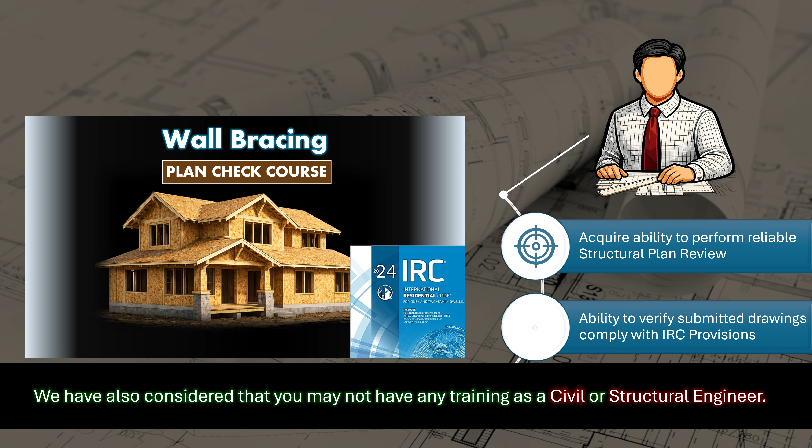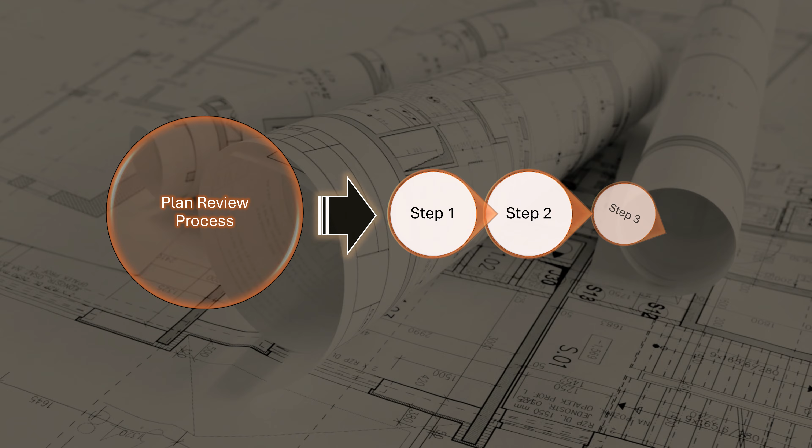The development of this course was guided by the assumption that the primary reason you are considering taking this course is to acquire the ability to perform a thorough and reliable structural plan review of residential wall bracing systems and verify that the submitted drawings comply with the provisions of the International Residential Code. We have also considered that you may not have any training as a civil or structural engineer. Therefore, we have spared no effort to ensure that this course has the capacity to help you achieve the objectives that brought you here. The good news is that while the plan review process may appear overwhelming at first due to the number of code provisions involved, a disciplined and structured methodology can transform the process into a manageable and repeatable professional task.

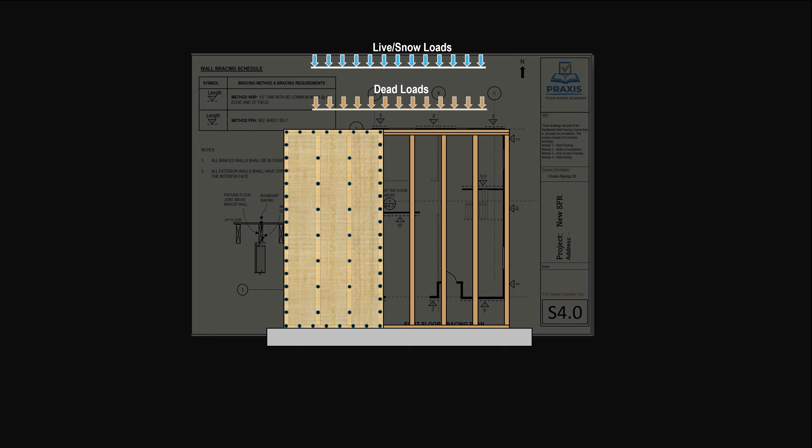The plan review process for braced walls begins after the reviewer has determined the wind and seismic design criteria that should apply to the project at hand. The structural design consists of the development of a system of structural elements to resist gravity loads such as dead loads, live loads, and snow loads, as well as lateral loads including wind loads and seismic loads. Wall bracing is specifically installed to provide support against lateral loads such as wind loads and seismic loads, and therefore belongs to a system of structural elements known as the lateral force resisting system.

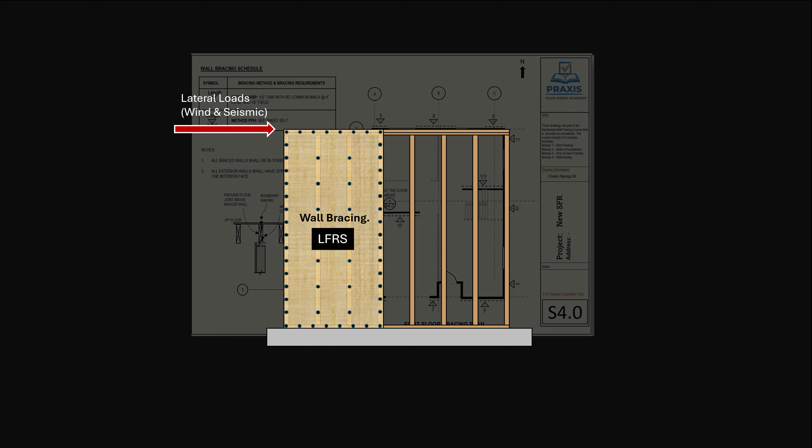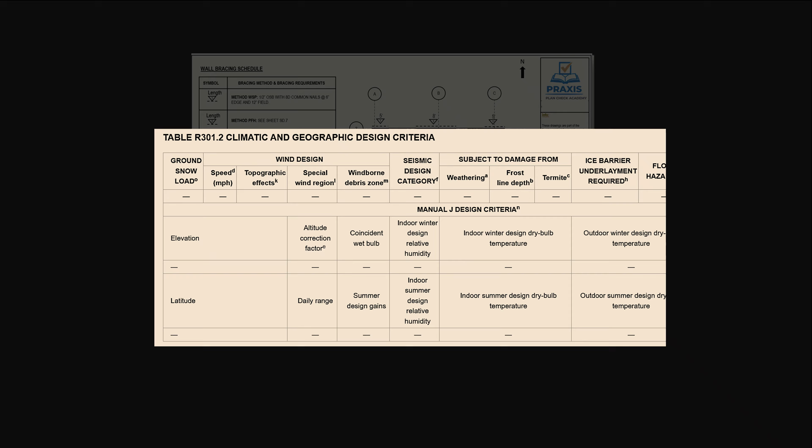This course will not just look at wall bracing in isolation. Rather, we will look at the entire lateral load resisting system and see how everything comes together to form a robust structural framework that conforms to the adopted building codes. We will start by breaking down the intricacies of wind and seismic loading as it is envisaged in the residential code. At this introductory stage, we will guide you through a comprehensive lesson on the fundamental parameters that underpin the wind and seismic design criteria. This will ensure that you will gain a thorough understanding of their development and application in design practice.

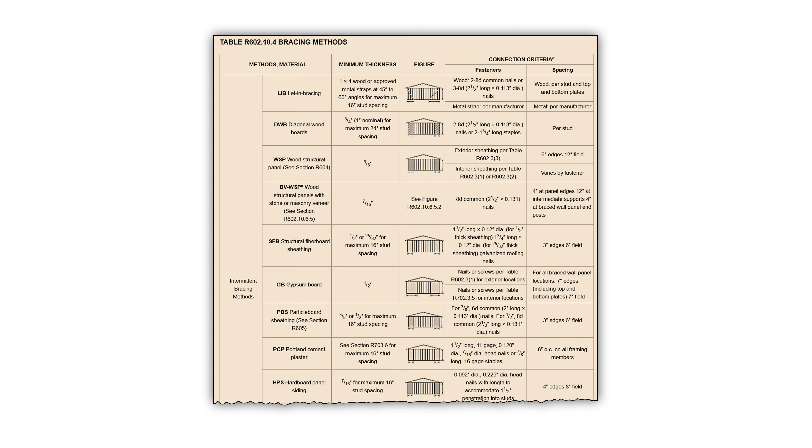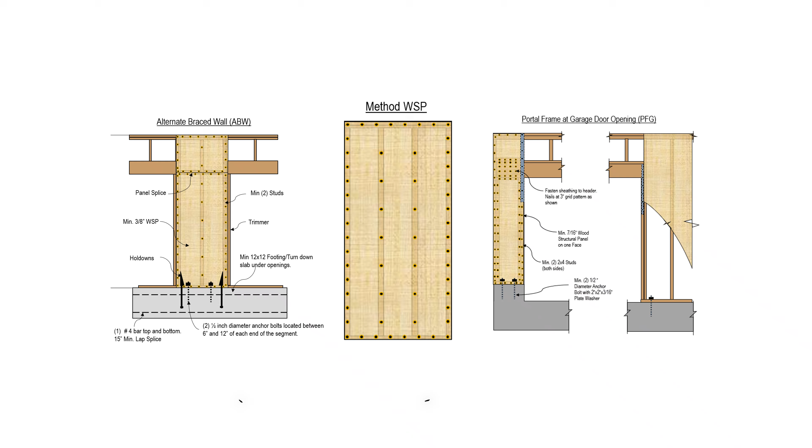This comprehensive introduction will open the way that allows us to dive into the heart of wall bracing. We will embark on a thorough and extremely rigorous exploration of the code provisions for the design and construction of different wall bracing methods, where we will focus on the most common bracing methods before exploring the limitations for mixing bracing methods on a project. We will look at the properties of braced wall lines and the code provisions governing their placement on a floor plan. Additionally, we will look at the placement of wall bracing along a braced wall line, including all the constraints that govern the location, spacing, and distribution of wall bracing.

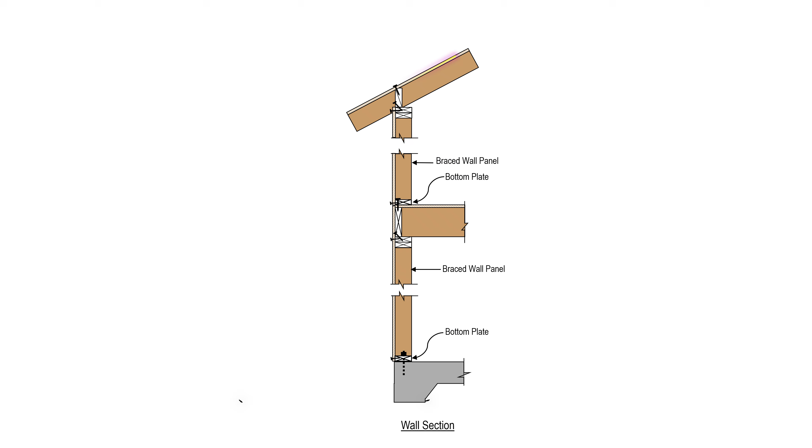This will bring us to the load path section, where you will learn how all the critical elements come together to form a continuous system that has sufficient capacity to transfer lateral loads from the roof to the foundations. Additionally, we will cover all the requirements for the foundation supporting braced walls.

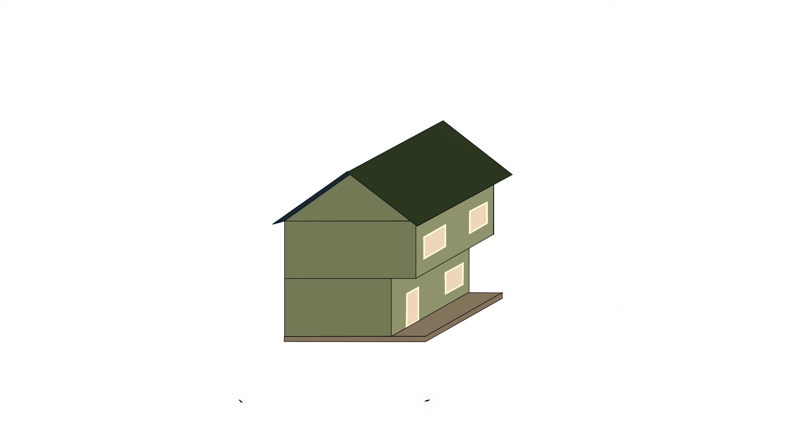After looking at the review of code-compliant structures, the final section will be on irregular structures. We will undertake an in-depth and highly detailed examination of the code provisions defining structural conditions that are classified as irregular structures. These are architectural and sometimes structural elements that create conditions that are not envisaged or anticipated by the prescriptive code provisions. We will show you how to identify these conditions when doing plan reviews to ensure that projects intended to conform to the conventional construction provisions do not exceed the limits of the residential code.

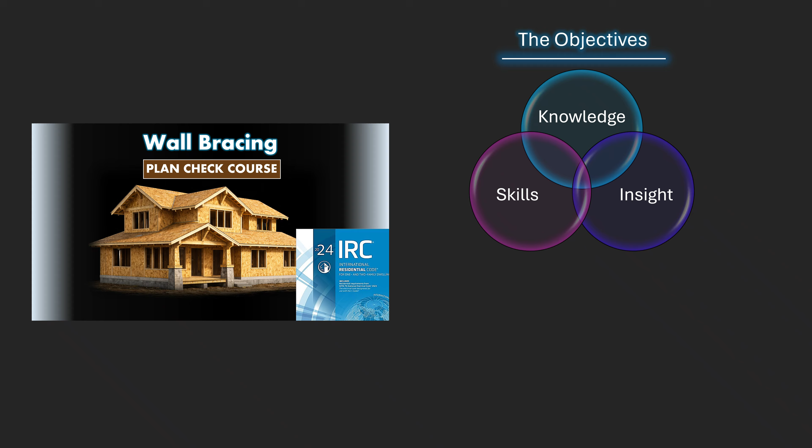This course is intended to provide you with a comprehensive exposure to the knowledge, insight, and systematic review skills necessary to perform structural code compliance reviews with confidence, consistency, and professional clarity. In professional practice, the plan reviewer is routinely confronted with an enormous variability in style, layout, and design integrity when reviewing plans prepared by different designers. This variability introduces uncertainty and demands a disciplined approach that does not rely on assumptions or familiarity with individual drafting styles. A successful plan review process must therefore be based on a methodology that distills the essential structural elements from any project and systematically maps those elements onto the requirements of the code to verify compliance.

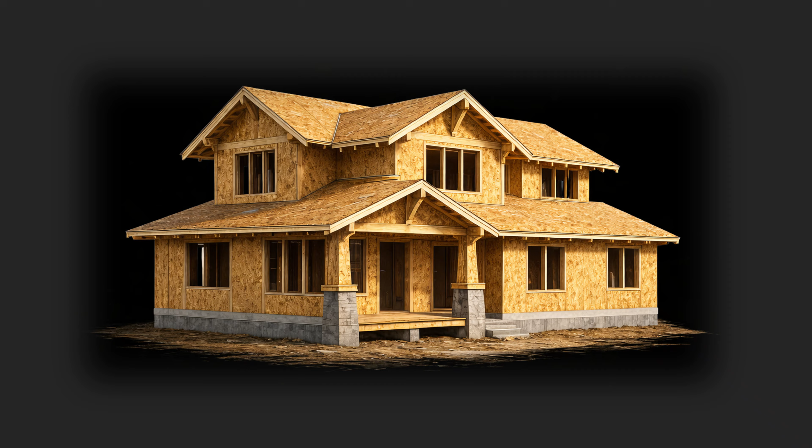When any portion of the design does not meet the requirements of the code, the plan reviewer must be prepared not only to identify the deficiency but also to communicate that deficiency in a clear and enforceable manner. The necessity for a plan reviewer to have a solid grasp of both the material provisions and the intent of the code cannot be overstated. Equally important is the development of a structured strategy that allows the reviewer to unpack a project into distinct components that can be evaluated independently and then reviewed contextually as part of an integrated structural system.

This course goes a step further by demonstrating how to prepare effective plan review comments, which represent one of the most valuable and often overlooked skills in the plan review process. Writing effective comments is not simply a clerical task, it is a professional responsibility that directly influences the clarity, efficiency, and success of the review cycle. Plan review comments must be unambiguous and concise while still providing sufficient information to allow the designer to understand the basis and intent of the comment.

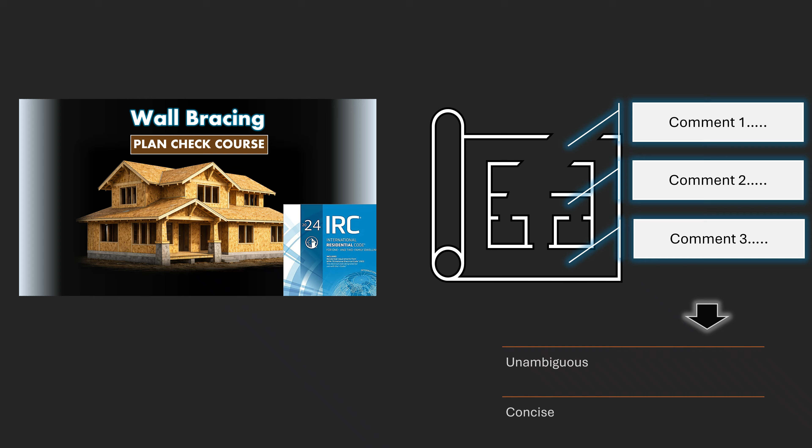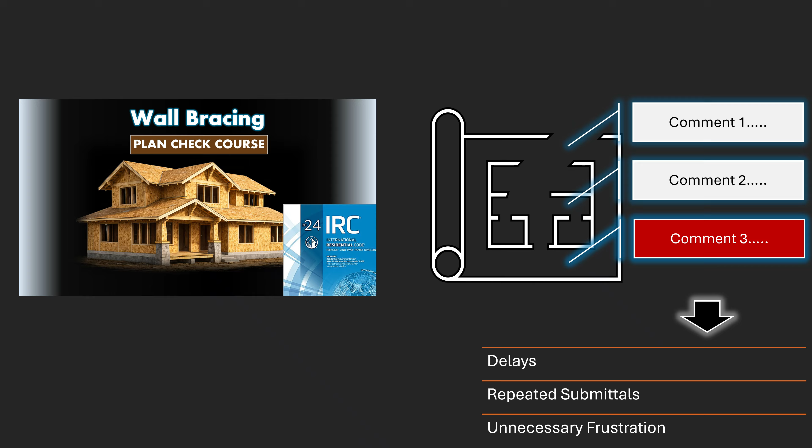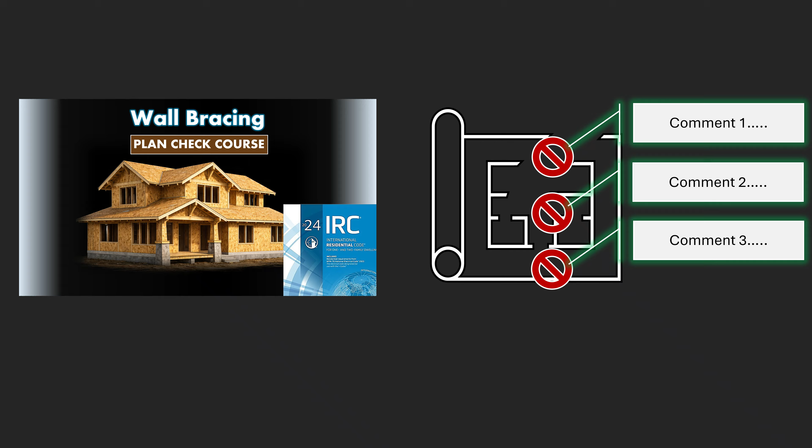Comments that lack clarity or precision are often misunderstood, leading to delays, repeated submittals, and unnecessary frustration for both the reviewer and the designer. For this reason, the methodology presented in this course treats comment writing as an integral component of the plan review process rather than an administrative afterthought. Each identified deficiency is paired with carefully structured commentary that reflects both the technical requirement of the code and the professional responsibility of the reviewer to communicate expectations clearly.

Whether you are seeking to strengthen your professional review skills, improve the consistency and clarity of your plan reviews, or develop a disciplined methodology for evaluating structural drawings, this course provides the knowledge and tools necessary to help you succeed. Your journey to mastering wall bracing plan review begins here.